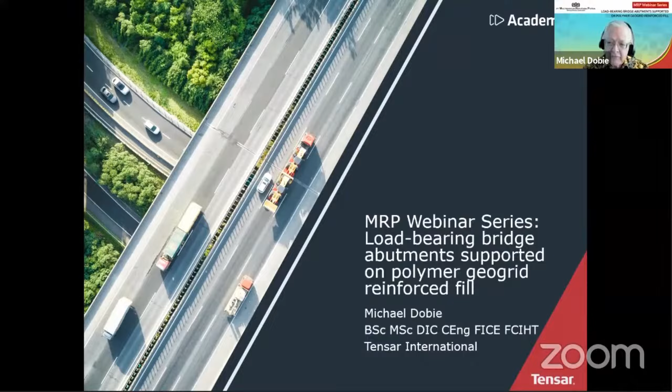The talk today is not highly technical. There are a few technical bits here and there, but a lot of images and messages about the capabilities of this technique when we use it for this particular application of load-bearing bridge abutments. Exactly what I mean by that will become clearer as we go along.

So as you've heard, this is the 9th in this series of geotechnical webinars organized by PT Multibangun Rekatama Patria, and we're looking at load-bearing bridge abutments. The important point is that the load from the bridge deck and any live loads is carried by the polymer geogrid reinforced fill beneath it and then transmitted down into the foundations.

That's the important feature. I have made this presentation a few times before. In fact, it goes back a few years in its original form in New Zealand, and I've also done this in Australia, here in Jakarta once, and also in Malaysia.

Just to let you know, our 10th webinar will look at another reinforced soil technology technique, which is the design of these structures and their performance when we have strong earthquake shaking. That'll be our next event, which will be in November.

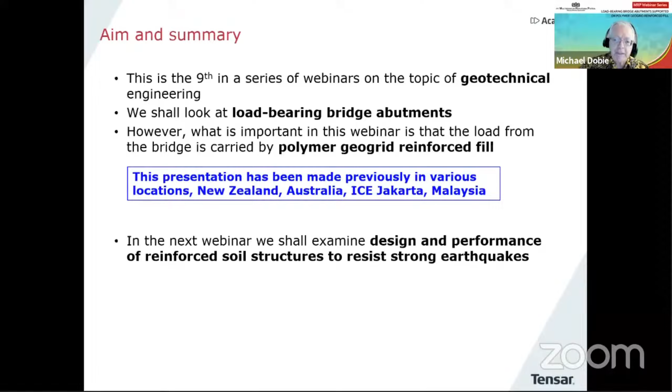So let's have a few images of these structures. We'll meet these all again later on. Here's a very nice looking bridge that you might see anywhere, but this is actually a load-bearing bridge abutment supported by reinforced soil. So is this one. It happens to be a temporary bridge. Another one here, built quite some time ago.

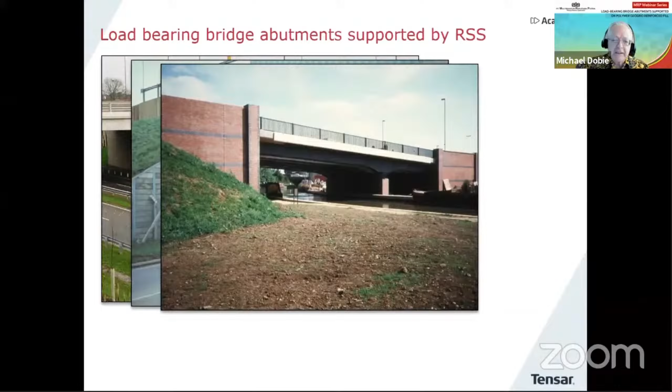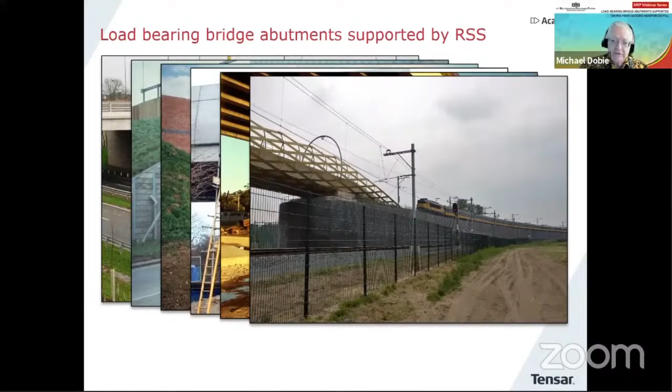We'll also see a bit more about this one shortly. And another one here. This one is interesting because it's actually carrying a road over a railway line. This one is in Australia, Barney's Point Bridge. We'll look at that one in some detail later on. And also this interesting looking bridge in the Netherlands, which is carrying railway loading. But I think you can already see from those pictures a wide variety of possibilities when it comes to load-bearing bridge abutments using reinforced soil to support the loads.

So I think by now you've realized the main aim of this talk today, but the important point is, and I'll repeat it one more time, that we're looking at structures where the loads from the bridge deck, both live loads and dead loads, are supported by the reinforced soil mass beneath. There is no other concrete structure inside the reinforced soil, just soil and geogrid reinforcement. It's not a very new topic or application, and we'll learn a bit more about that as we go along.

As usual in my webinars, I've got these little blue boxes that pop up from time to time, which provide a bit of additional information and maybe a question or two. So really, this is aimed at civil engineers who are involved in reinforced soil projects, or projects where you might want to make use of reinforced soil.

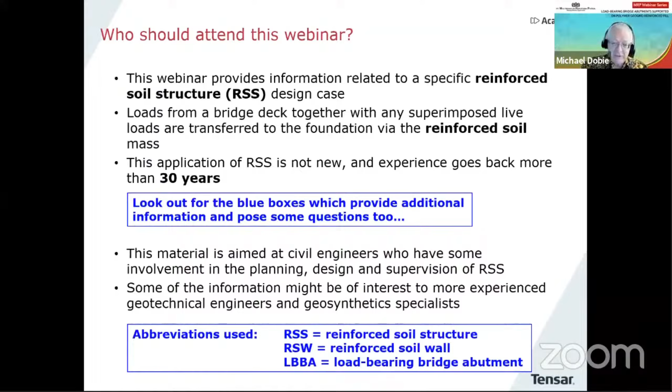This should be of interest to more experienced geotechnical engineers and geosynthetics specialists. I'll mention some abbreviations that will come up on the slides: RSS for reinforced soil structure, RSW for reinforced soil wall, and LBBA for load-bearing bridge abutment. This saves me typing these things out many, many times.

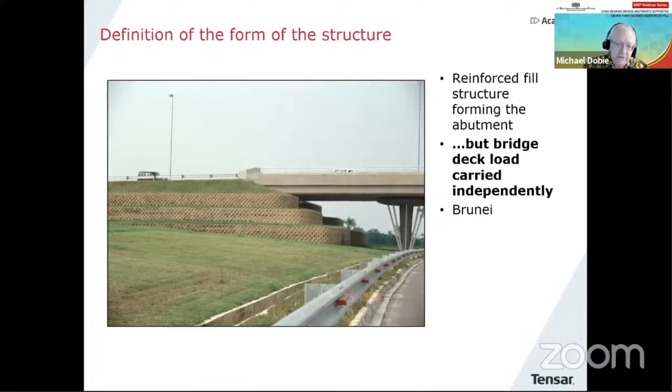And yet another one in New Zealand. In this case, the supporting structure for the bridge is in front of the reinforced soil mass, which forms the approach to that particular bridge.

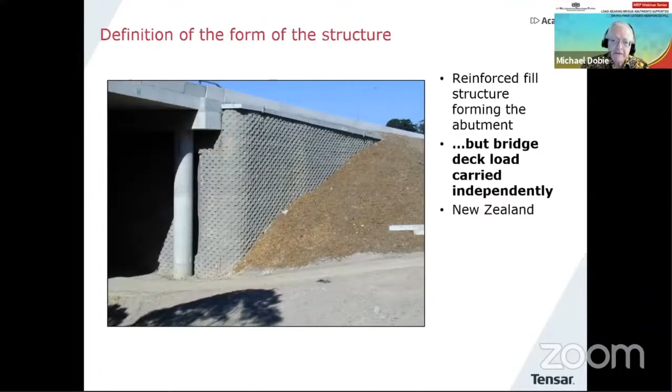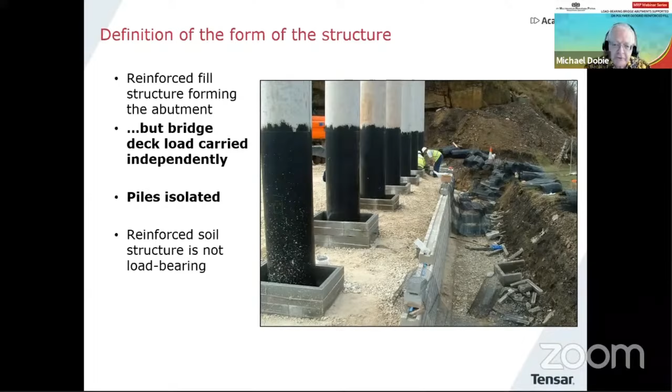Here is a bridge abutment under construction. You can see the supporting concrete structure has been isolated from the fill, so there will be no interaction between the two. That's quite common, and the bridge abutment will be on top of those concrete structures. In this case, reinforced soil is being used to form the abutment around the structure, but it's not load-bearing - it's not carrying the load of the bridge.

Here's another option which quite often happens. In this case, the piles are not isolated from the fill - they're simply within the fill, and the fill is built up around the pile, which will be supporting the bridge load when completed. In fact, that situation sometimes causes a bit of uncertainty in design - what do you do about that pile within the reinforced soil mass? It's a quite common discussion, but today we're not talking about that. We're going to be talking about something different.

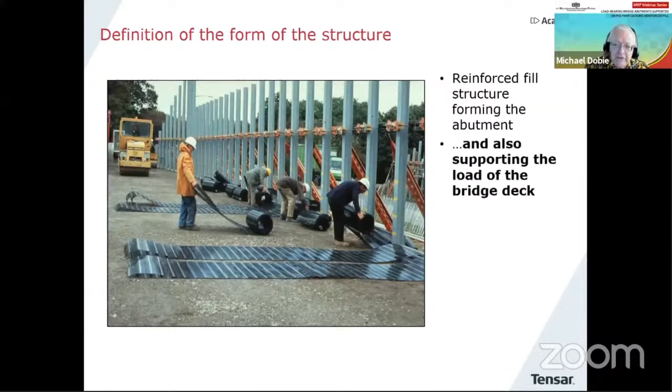What I want to talk about for the rest of this presentation and webinar is reinforced fill structures like this, where they support the load from the bridge deck. This is the whole purpose of the webinar today.

A few examples. This one from the United Kingdom, around 1990. It's a load-bearing bridge abutment - I use that abbreviation LBBA. In the US, if you're familiar with the terminology there, this is often called a true abutment. You can see there they are laying out geogrid. This particular bridge will rest on bearings, but we'll come back to that in a minute.

One point to note here, it's a pretty good high quality fill. I'll talk briefly about the fill we should be using again later on. There it is, almost completed, and completely finished in this picture.

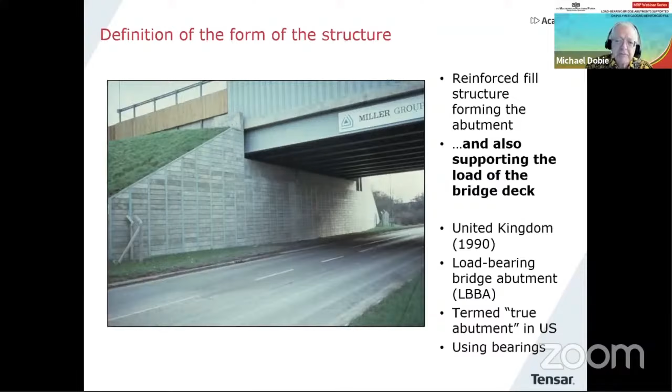Now, this actually was a temporary bridge. One interesting thing about it - the load from those bridge girders is going straight through the reinforced fill that we just saw, but it's designed to carry very heavy loading from mining trucks. So quite an interesting particular example of this technology.

In that particular case, the cross section would look something like this. We have the bridge girder resting on a bank seat, and the bank seat supported on the reinforced fill. That's quite a common arrangement. In this image, I'm showing the bridge supported on a bearing, which allows the bridge deck to change

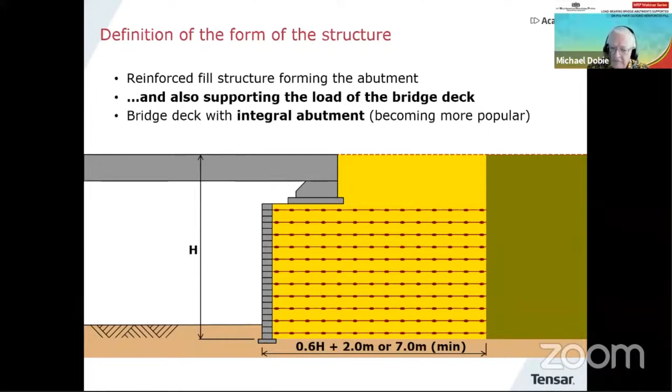its length slightly due to temperature and so on. That is one option, and perhaps most of the earlier bridges with reinforced soil abutments were built using the bearing approach. There is another option becoming much more popular now, which is the integral abutment, whereby there is no bearing, and essentially the bank seat and the bridge deck form a single unit.

Just to show you an example of that under construction. Here is a bridge abutment being built, and you can see there the back of the bank seat being built right behind the facing of the wall. We'll see that from the other direction in a minute.

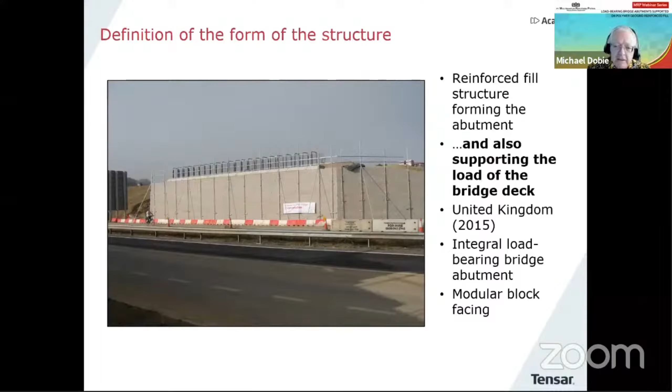This is an integral load-bearing bridge abutment, United Kingdom, 2015. There's the view from the front during construction. You can see the bank seat there, which will be built up to carry the bridge girders. And there they are in position.

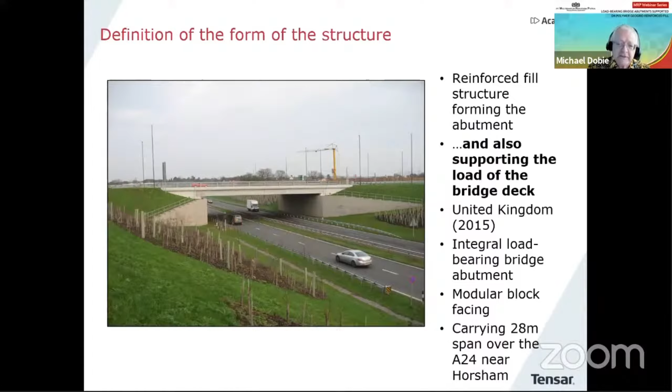So it's now nearing completion. It's using a modular block facing in this case. And there is another view of it. This is actually a 28-meter span over a fairly major road in the south of England. And there it is, pretty much completed. A final view of it in use. I think it's a very nice example of this kind of technology in use.

As I said, it seems to be becoming more and more popular these days. One of the nice benefits with regards to the integral abutment is that the reinforced soil structure is somewhat ductile. It's able to deform a little bit, which of course you need in this case. So I think it's a very good combination, using integral abutments with reinforced soil support underneath.

Perhaps you'd like to look at the cross section of that particular project. Just to show you what they look like, you can see that the reinforcement is relatively long compared to the height of the structure, but that's part of the design requirement that's being followed. That designation, the granular fill type 6I, 6J, is a UK designation, but that's a good quality fill. You can see also that the geogrid is quite closely spaced and even closer at the top

because the loads are at their highest there from the abutment seat. There'll be some backfill behind it, and then the integral abutment rests quite close to the front. This is drawn roughly to scale, bit of infill there, and we build the road on the top. So there is the complete cross section of that previous project.

And what is interesting, for those familiar with these things, are the loadings involved. We have on top of that a 300 kilopascal dead load, obviously from the bridge itself, and up to 200 kilopascals live load, which is from the traffic. There will also be a braking load, so there will be horizontal loads as well to be carried by the bridge abutment system. But it's a very good example of this type of technology in use.

Now, the question here is, is this a new idea? Well, I've already answered that question, but I'm going to answer it again. I was lucky to go to Munich in 2018 and attend an IGS workshop from the reinforcement group. One of the sessions was led by Professor Jorge Zornberg, who talked to us quite recently at an ENA IGS webinar. He had a session on another one of his specialities, which is load-bearing MSE, mechanically stabilized earth abutments.

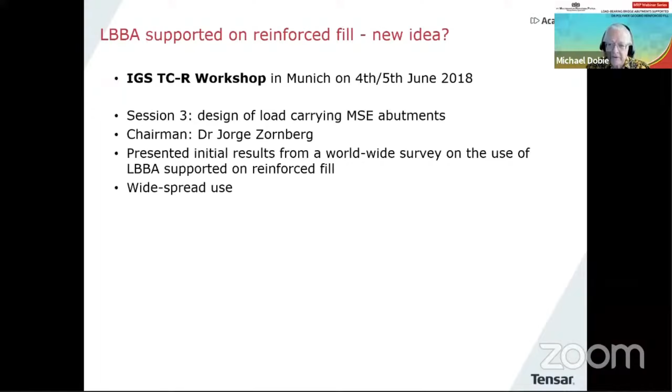He presented information from a worldwide survey to get some idea of the use of this approach. And it turns out to be quite widespread, in some countries more than others. So for example, in the US, UK, and Europe, it seems to be increasing.

Not so sure it's quite so much in Asia, but maybe that's something that could change, with the exception of Japan, which I'll mention briefly later on.

So we've learned something about the experience with this technology. The answer to the question above is definitely no. We've already seen a temporary structure built in the UK in 1990, which is 31 years ago.

Let's look at another one. I particularly like this structure because it just looks nice. What's being built there is a polymer reinforced soil block. You can see the steel bridge beam resting on top of it, and there is a central pier.

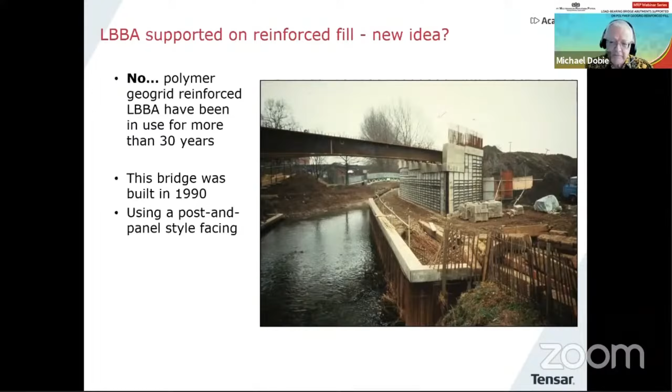This one is also being built in 1990. It's using a post and panel style of facing, which people tried to use in those early days because it made use of readily available components rather than specialized ones like full height panels, which we'll see later. This is to carry a fairly major road in the UK over a river.

It's designed to a code called BE 3/78, which was a sort of precursor of BS 8006, but specifically for load-bearing bridge abutments. So that is what it looks like, and there it is finished. Now, because UK people like brickwork, that original facing was actually finished with a brick look, so it looks very nice. It is brickwork, very attractive, and there's perhaps a clearer view of it you can see there.

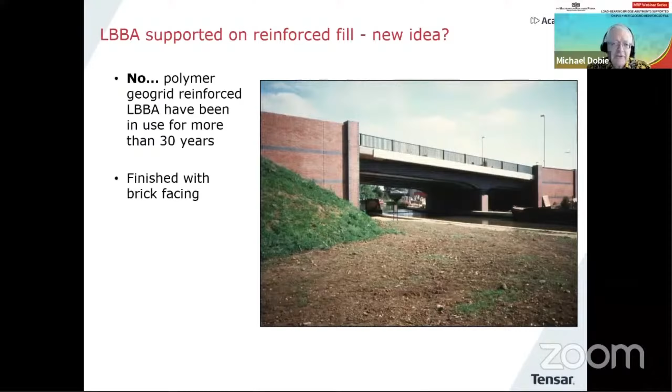I've looked at these pictures many times over the years, and I thought, what does it look like today? Sadly, no chance to head off to the UK to check it out myself, but luckily the internet can come to our rescue, and I found this rather nice picture. There is the river, and we can see the bridge abutment there.

This was about 28 years of service. Also, because of the incredible abilities of things like Google Maps, I could actually look at the top of the bridge. You can see the steel railing on either side, and also the expansion joint just behind that truck. It's rather nice that we have a couple of heavy vehicles crossing the bridge at that particular moment. So yes, this structure is still serving its purpose very adequately 30 years on.

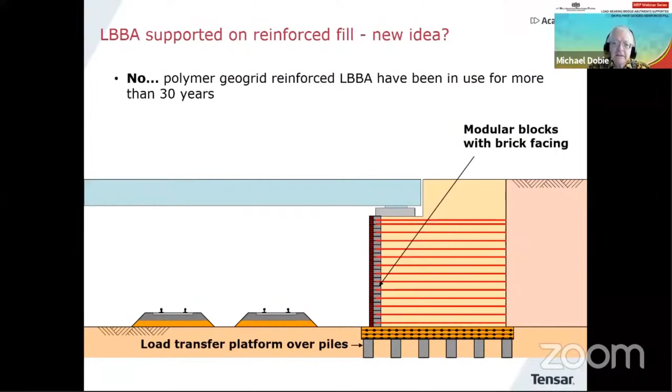Another one, a bit younger, built in about the year 2000. It has an extra feature which is quite interesting. This is the west of England, and parts of the west of England have some quite soft soils. So in this case, this abutment is supported on piles, which you can see there in the diagram.

Then what's called a load transfer platform is placed over the piles to spread the load from the abutment above into the piles. So we're seeing two geosynthetic technologies being used at the same time, but it permits the load to be spread nicely down into the load-bearing layers further down. This is crossing a railway, as you can see from the picture, with a train going by.

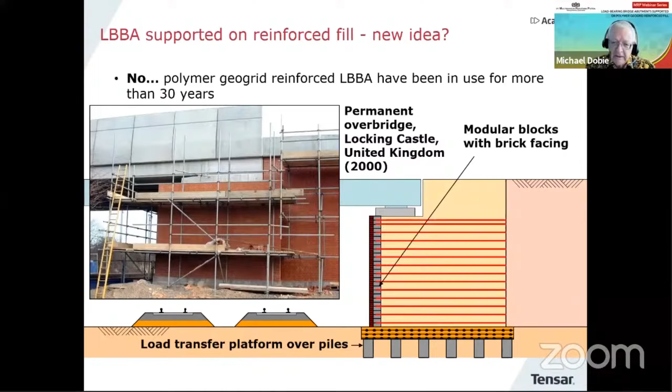Again, they're using modular blocks, and at this stage it doesn't look particularly attractive. But again, with this desire to have things covered in bricks, it was later covered in brickwork, and that was the final look of the structure. A general view of this one, we can see it here - it's a very elegant looking bridge.

Again, I thought, what does it look like today? If we make good use of Google Maps, we can see it carrying on doing its function extremely well, in this case after about 20 years or so. So those are two examples of bridges. They were both using bearings - not integral - just showing you some of these early examples.

So let's talk briefly about design. Is there guidance available for load-bearing bridge abutments constructed from reinforced soil? The answer is most definitely yes. The obvious one you would go to if working in the UK, and certainly some of those examples we saw were in the UK, would be BS 8006. Section 6 provides information on how to carry out design for these structures.

It was first published in 1995, and already had this advice back then - that's 26 years ago. It covers the ultimate limit state and serviceability, which is important, and I'll mention that again briefly as we go along. But there's no earthquake loading. So if you're designing for earthquake loading, like you would be in many parts of Indonesia, BS 8006 doesn't give you advice on that - you need to go elsewhere.

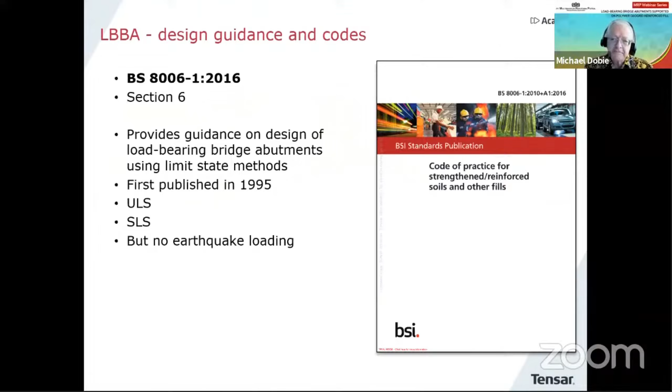Also, we carry out a post-construction strain check on the reinforcement, and we limit that post-construction strain to 0.5%, which we'll see again briefly in a minute.

Then the program does a check of the stability of the bank seat itself. And it looks a rather hair-raising view, that one, with lots and lots of numbers and so forth. But it's what it's doing.

It's taking 6 different load cases. We have the temporary case where we don't have the bridge in place, and then of course we have the long-term case with the bridge in place, and they both have to be looked at individually.

And then we calculate the loads from the bank seat, which are applied to the top of the reinforced soil structure. So that's the cross-section we would then see, and that can be analyzed, taking into account those additional loads from the bridge applied into the reinforced soil mass.

Now, this is using the BS 8006 tie-back wedge method, and in this one, you can see we've achieved a satisfactory layout of Geogrid. And then we can do this post-construction strain check.

So what you're seeing in this particular window, the little gray diagrams on the left with the colored bits in them, those are an assessment of the distribution of strain, post-construction strain, along each piece of Geogrid for the long term. And then we can take an average value.

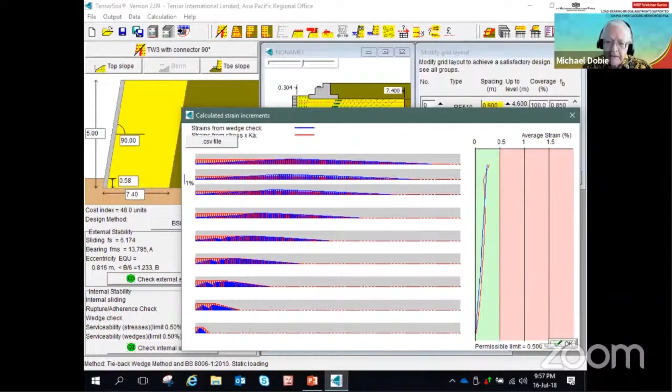The profile on the right-hand side where it says average strain, if you can read that, you can see the limit of 0.5 is given there. So as long as you remain inside the green zone, then your post-construction strain prediction is within the requirement of BS 8006. We're going to come to that again briefly in a second to explain how that's actually working.

Now, there we have our design, it's satisfactory, but maybe in Indonesia, we want to look at the case of earthquake loading. So we have some help.

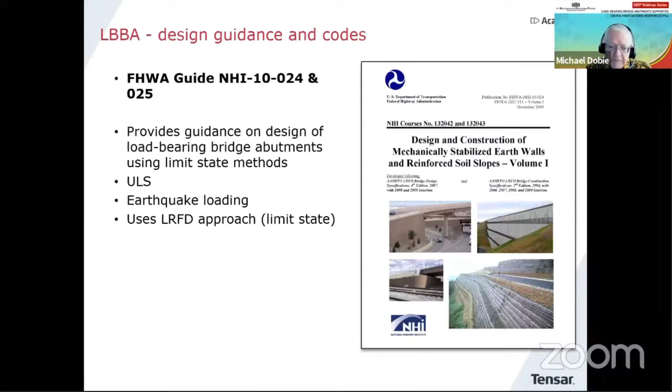And there is, if you like, an accompanying document published by FHWA with that particular reference there NHI-10-024 and 025. And this is nice because this is also based on limit state, using the LRFD approach, and it has a very nice detailed worked example in Appendix E5.

So if you want to understand much more about the calculation procedure, you can go and look inside that particular document. Appendix E5 will tell you a lot. Sadly, in a way, the worked example doesn't include earthquake loading, but you'd have to see how that works by looking at the rest of the guide.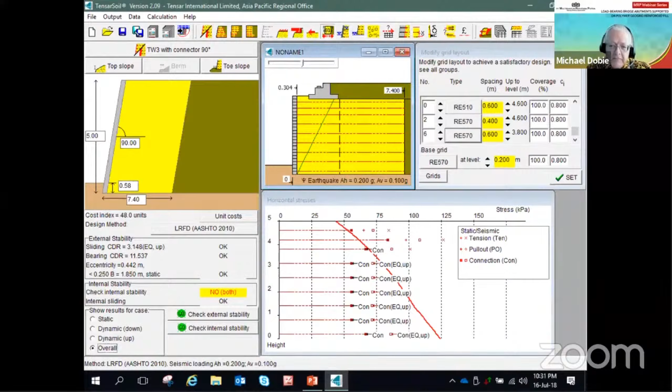That's mainly coming from connection issues, but that's a bit of a weakness of that particular technique, the tie-back wedge. However, this means if we wish, we can analyze it using that technique. But what we can also do is switch over to a 2-part wedge method.

And this is something I talked about actually in our previous MRP webinar, the benefits of using a 2-part wedge approach.

And that's what's going on here. So all of those green lines you can see in the cross section are wedges that have been analyzed, taking into account the bank seat loading and giving a satisfactory result, much more efficiently than tie-back wedge. And there is the result of an internal calculation.

You can see here we have two different loads. Z is the applied load, R is the resisting load for any particular wedge. And you've just got to make sure that our CDR, that's capacity demand ratio, the ratio of the two, is greater than 1. And you can see in this particular case, it is.

That can be done for the static case. And you can also see down there the dynamic case, with both the vertical acceleration up and down. That's a topic I'm going to talk about more in the next webinar when I talk about reinforced soil design, this issue of the vertical component of acceleration and why you might want to take it into account. So that's something to talk about next month.

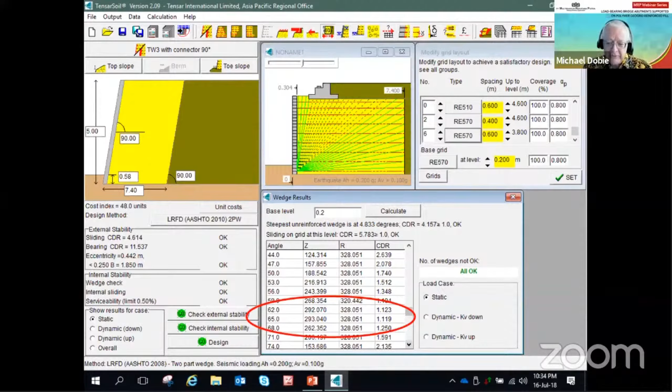And there we have a satisfactory design.

And you'll see also later on in some of the examples I show you the use of sand fills. Of course, a good quality sand would also be extremely good. This is almost certainly a case where you'd want to avoid clay fills, not because you couldn't design for them, but I think more because the deformations may be a bit difficult to control in service, especially the vertical deformations. So this is definitely a case where it would be wise to avoid the clay fills or the tanah merah fills, I think, for load-bearing bridge abutments.

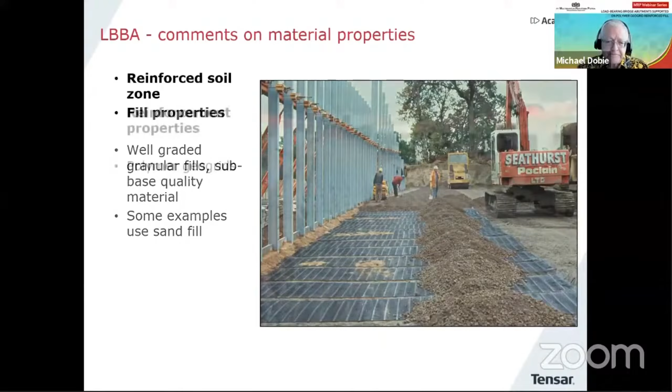Just a few words about the polymer geogrids. We can see some geogrids laid out here behind a panel wall. It's not actually a bridge abutment, but just to remind us what these materials can look like. These are HDPE geogrids. And in order to carry out our designs, we need strength values for ultimate limit state, that's to say long-term failure, serviceability limit state, that's to say controlling deformations, and also the seismic case.

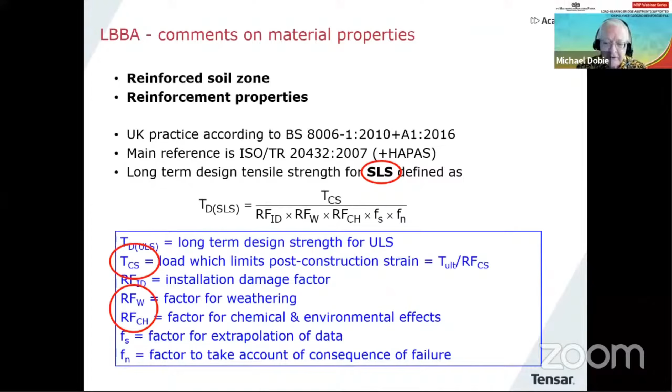Now, as you see it there, this is defined for the ultimate limit state, in other words, failure or rupture of the geogrid. But when it comes to load-bearing bridge abutment design, we also want to have a second definition, which is for the serviceability limit state, called SLS for short, inside the red circle near the top, in the middle of the slide. And we've now slightly changed because we're now using a thing called TCS. That's the load which is going to limit the post-construction strain to a certain value. And that's what I want to talk about briefly.

So to find out this particular piece of information, we need to carry out what are called creep tests, where we hang up specimens of the geogrid in a creep laboratory with weights on the bottom, and we measure their strain against time. I did talk about this briefly in the previous webinar as well. But today I want to concentrate only on one thing, and that's deriving what we call isochronous curves.

So from the creep data, we can derive load strain curves. Now, load strain curves are things that people like to see when it comes to, say, a tensile reinforcement. People understand this very, very nicely. It's that very, very important relationship between load and strain.

And we can derive it in this case for a duration of 1 month of loading, and that's what we see at the moment on that graph. We can also derive a second line, in this case for a 120-year duration.

Now you might say, well, how can you possibly do that? We haven't been doing creep tests for 120 years. Well, we can use high temperature testing to help us do that. That's quite a long discussion, so please accept my word for it for the time being, but we can do that by careful interpretation of creep testing using high temperature data.

So we now have two isochronous curves, one for 1 month and the other for 120 years. And then what BS 8006 requires is that the post-construction strain should be limited to 0.5% during working life, or post-construction. It is assumed that post-construction is from about a month to the end of design life, in other words, between those two curves that you can see.

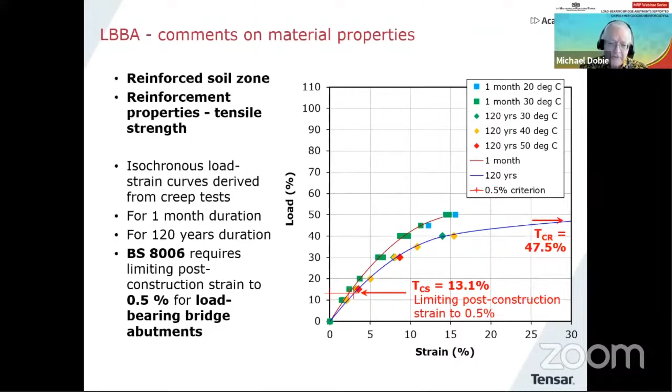And when earlier on we saw that little window pop up with the 0.5% in it, that's what it was limiting when we set that within the design procedure.

Perhaps just worth mentioning that when you carry out design of load-bearing bridge abutments with reinforced soil techniques, sometimes because of this 0.5% requirement, it's quite often that the SLS check could be more critical than ultimate limit state. In fact, in the early days, say the BE 3/78 document, that design procedure was based on serviceability mainly.

Just leaving strength behind and going to durability, just a few words. Again, I covered this in quite some detail in the last webinar, in MRP 8 webinar, but we need to be very careful about this. We need to check that we have adequate durability, and that's normally in terms of things like weathering.

You're not going to expose the geogrid for long in a load-bearing bridge abutment, so that's not going to be too much of a problem. But things like microbiological degradation, oxidation, and the effect of acids and alkalis need to be investigated using both screening tests, which are quick tests, but to get the real long-term predictions, we need to carry out a lifetime

exposure tests. So this is a really important thing, especially because durability becomes even more important in hotter climates. Generally, polymers will be affected more rapidly under higher temperatures when it comes to degradation. So we have to be extra careful when it comes to climates like we have here in Indonesia, where it's generally hotter and wetter. So please take that into account when you think about these things.

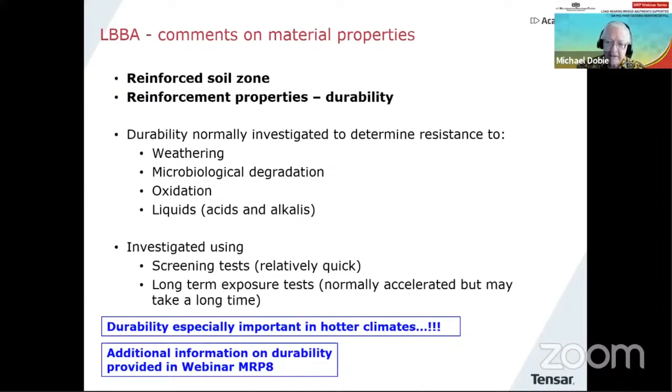So let's leave those material properties behind and now look at some measured static performance. And let's start with one of the very early ones. It's interesting, certainly in the UK, this was built in Stirling in Scotland.

It's just a pedestrian underpass. It's not a very huge span, but it is carrying a road load. The structure on top is a road, so it's carrying normal traffic loading up to heavy trucks.

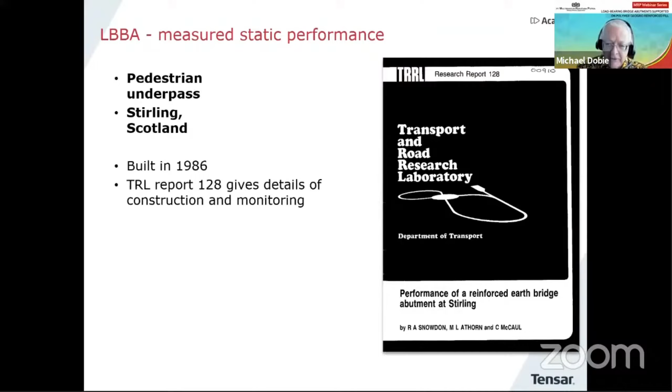And this one was dating back 35 years now, so quite a long time ago. And because it was a very early structure, a lot of attention was paid to it, and there is quite a comprehensive report, it used to be called TRRL, it's now called TRL, Report 128, which tells you all about the construction and monitoring of this particular structure.

So they used a cellular mattress, which today we call stratum, to help support the abutment and spread the loads into the softer soils underneath. It was a simple little structure by today's standards, but a very early one, and lessons were learned from it.

When it comes to the monitoring, it was found that the total deformation at the top of the panel was less than 20 millimeters, and it rapidly stabilized. If you want to see this in more detail, you'll have to get hold of that report or ask me for a copy.

The vertical settlement actually was bigger than the horizontal movement, but because of the slightly compressible subsoils, they got up to about 58 millimeters of vertical settlement, which also reduced with time.

When it came to the geogrid itself, the maximum increase in strain during the service period was about 0.7%, with a mean value of about 0.3%. I've got a feeling that this data was part of the contribution to those early limits still published today in BS 8006 about a mean strain limit of 0.5% for load-bearing bridge abutments.

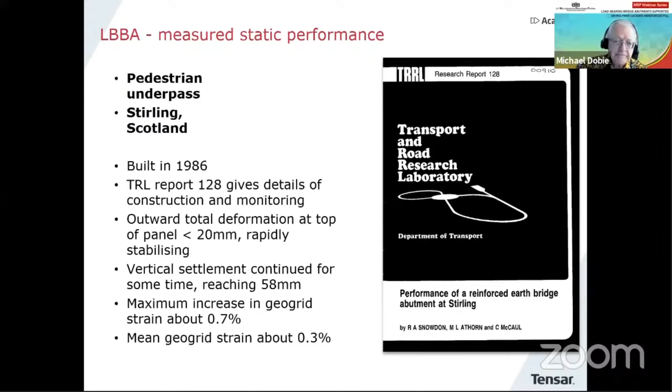And here is a bigger one straight away. It's one that I saw from day one pretty much. Barney's Point Bridge, built over the Tweed River, which separates Queensland from New South Wales on the east side of Australia. This one was built in 1993, so this is getting quite old now as well, 28 years or so.

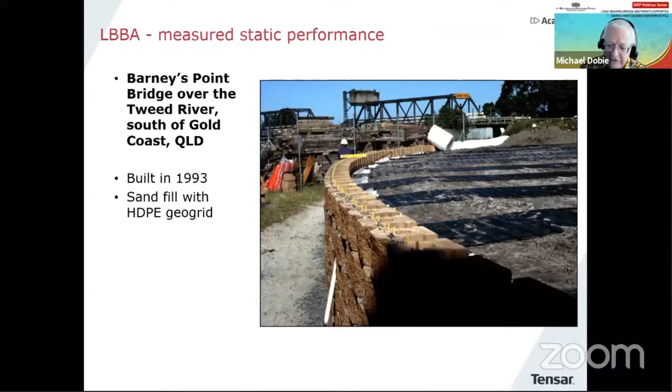This one is using a sand fill with an HDPE geogrid, and it's using a modular block facing, which you can see very clearly there. Also in the distance, you can see the old bridge in that particular photograph.

Because it was early use of this technology in Australia, it was quite carefully instrumented. For example, one thing we used were these load bolts to try and measure the load in the geogrid. Now, there was one slight issue with that approach, because the load bolt system is so stiff, it was attracting too much load, so in fact they overread the load in the geogrid. So measuring load in geogrid is not easy.

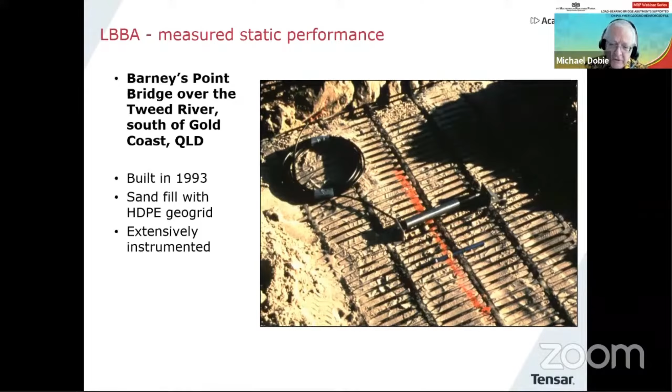Rather simpler is measuring strain, and this was done with strain gauges of this type. Again, these were on the top or bottom of the geogrid, so they work reasonably well, and we did get some quite good data on strain measurements.

First of all, there were targets on the facing that allowed us to measure the forward movement of the structure. And to be honest, if you're looking at instrumentation of these structures, that's one of the simplest and cheapest things to do - simply put some targets on the face and use accurate surveying techniques to measure their location and change in location.

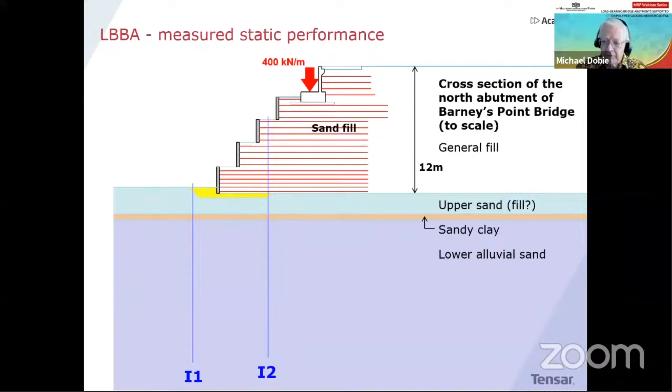So that's quite a high load. Overall height about 12 meters from the original ground level up to the road, and you can see the position there of I1 and I2. Now, one nice thing about inclinometers is as long as they don't get blocked or too distorted, they will last for a long time.

Many instruments like strain gauges are unlikely to keep going for 30 years, but inclinometers generally hold up well.

And we're going to have a look at a couple more before we come to a conclusion today. Another one built more recently, Founders Meadows, built in Colorado. There are 2 lengthy research reports, and if you can read the names on those documents, you'll see again Professor Jorge Zornberg's name there. He was quite heavily involved in this. This again was a load-bearing bridge abutment, heavily instrumented, carefully monitored, and I'm only going to show you a few pages from this, because if you want to study this in detail, I suggest you get hold of these reports - there's a lot of information in them.

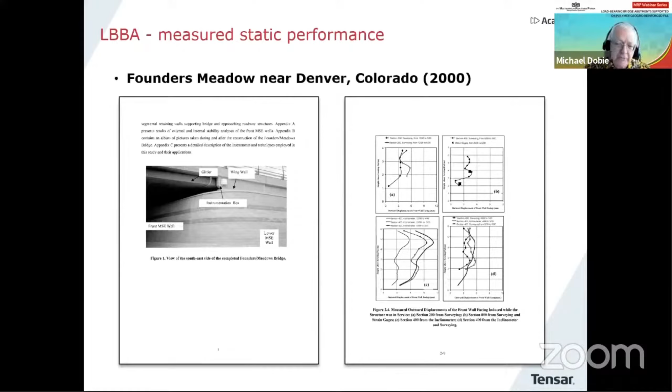So here we see on the left a picture of the bridge itself. You can see the bridge girder resting on top of the load-bearing bridge abutment, and that diagram, which I'm sure you can't read, shows the forward movement of the wall - the scale at the bottom is only a matter of a few millimeters, so very small movements. Then there's a cross-section through the structure, and the diagram on the right-hand side is the strain in the Geogrid during construction, and again those strain values are very, very small indeed. Anyhow, this is something to study - if you want to learn a lot more about that structure, those reports are readily available. That was Founders Meadows.

So now let's move to a bit more experience, because when I was first preparing the material for this presentation a few years ago, I contacted my colleagues around the world and said, look, I'm doing this work, and certainly that previous one obviously came from colleagues in the US. I asked if they had any interesting information on load-bearing bridge abutments I could use, and a good colleague of mine, Theo in the Netherlands, said yeah, we've got a few, and sent me this incredibly good information. This was one of them. I'm not going to show all of them today, but this one is particularly interesting.

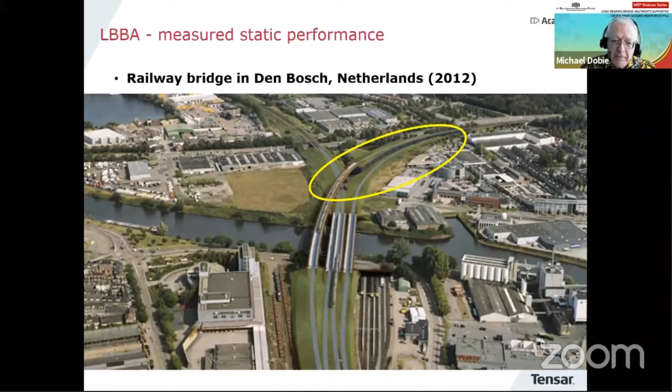It uses a technique particularly popular in the Netherlands, which is full height panels. It's worth talking briefly about these. We've seen a lot of modular block structures so far, which are small concrete units, but a full height panel is a large piece of concrete, so handling becomes much more important because they weigh several tons. One benefit is that because they're full height, you can put them all up very quickly with your crane, which is an expensive piece of equipment. Having got them all up, you prop them, and they are then all put up in one go, so then the crane is finished.

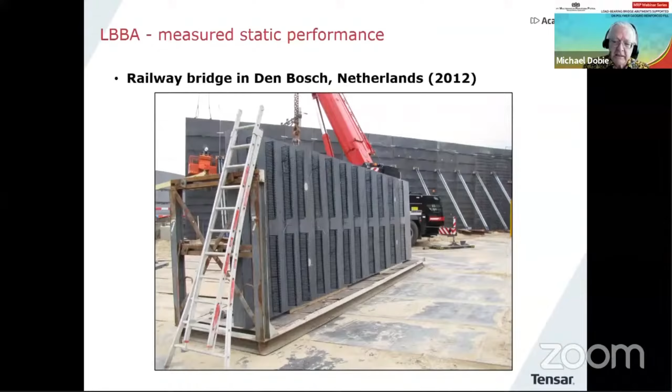There are pros and cons with all of these techniques, but let's look at the results of doing this one. After propping up the panels, which you can see in the background, and the one lying on its side in the foreground, little bits of geogrid will be connected to the main pieces of geogrid using a connector called a bodkin, and that forms the full reinforced soil structure when compacted into the fill. You can see here that they're being propped - that's the front nose of this structure, which will carry the bridge abutment itself.

Here we have a view inside that section of the structure. We can see the panels there and the placement of the sand fill. This is using a sand fill - the Netherlands, for those who know it, has a lot of sand, so most of these structures are built with sand fill.

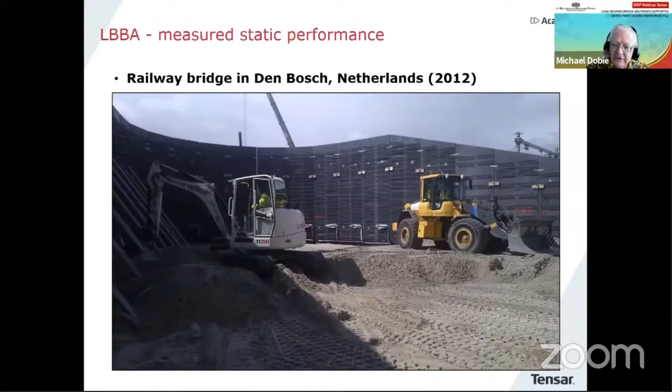That's the view now from the outside. The fill has reached almost the full height. One interesting thing here is that because the panels were propped on the inside, they were able to keep the rail track running nearby, which is quite a nice advantage of the technique.

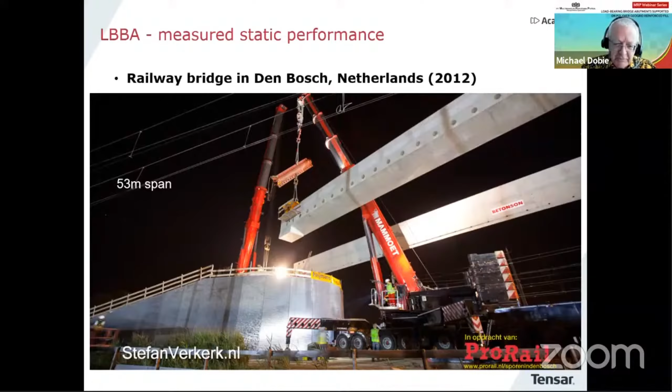But now we come to the moment of placing the bridge girders, and when I first saw this, I was certainly amazed. They're placing the bridge girders here - you can see a nighttime occupation of the railway using a couple of cranes. The span is 53 meters, which is a long way, and I think this must be one of the longest spanned bridges supported on reinforced soil load-bearing bridge abutments, as far as I'm aware. There you can see the ends of the girders resting on the bank seat foundation itself, so below there is just sand and geogrid.

Because it was such an important structure and there's so much interest, some simple targets were fixed on the facing panels at a number of locations to measure the movements, so they can be checked by surveying techniques. You can see the little white marks.

So if we look at B2, I'll explain it a little bit. The graph shows height in the vertical direction versus the movement. Zero is in the middle of the horizontal axis, and the next division is 20 millimeters.

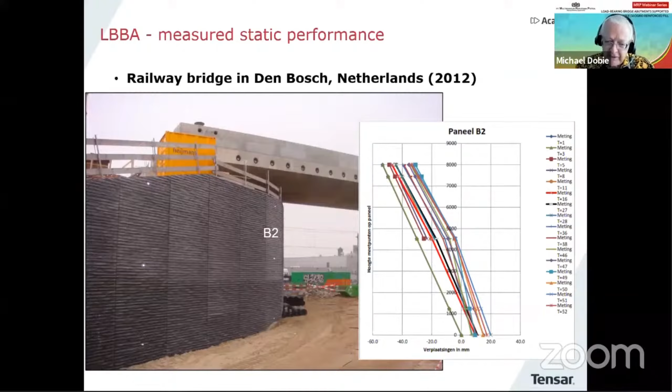Because this is a panel, you can measure it from day one before you even place any fill. The green position is when they first put the panel up, and most of that forward movement comes as you place the fill. There's also a bit of a jump in movement roughly halfway through, partly because at some stage they drove some piles into the sand fill just behind the reinforced soil structure, which also caused a little movement.

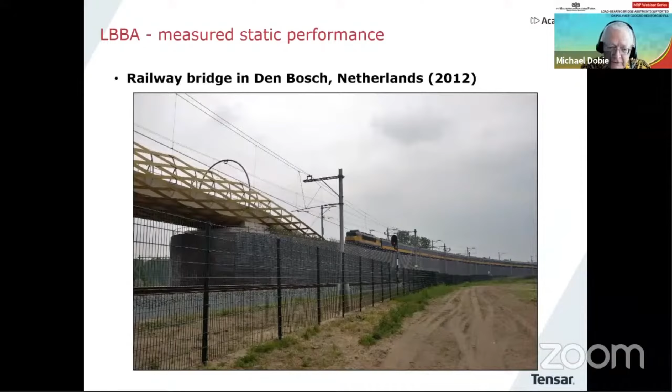The bridge was finished off with this rather interesting look to it, and here it is about to take the load from a train. When I first ran through these pictures, I was quite amazed. That's a 53-meter span carrying railway loading, supported on a reinforced soil structure. Really impressive.

Another one, perhaps not so grand, but it looks more like a regular bridge. In fact, it looks very much like the one I showed you earlier on, because it's similar - a similar kind of span built in Kent in the UK. Also, these are integral abutments built in 2016-17.

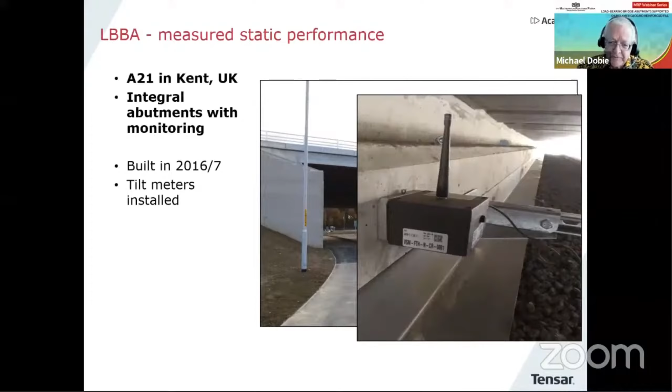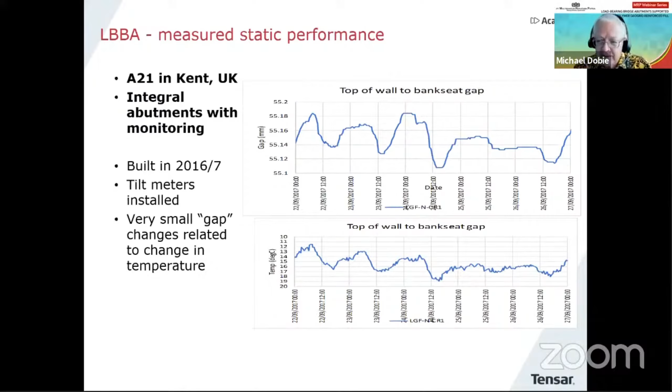That's going back to 2017, so we'd like to get that more up to date. There was also measurement of the gap between the bank seat and the wall at the top - the top diagram shows the gap in millimeters, very small amounts. You can see that this gap did slightly change against time, but the lower diagram is actually the measured temperature, so the majority of that movement is related very much to the change in temperature. It's important to measure all of these variables when looking at performance of these sorts of structures.

Now, the last thing is about performance under seismic loading. When it comes to bridge abutments, the reinforced soil technique, if you're expecting strong earthquake shaking, actually makes a great deal of sense, because you have a very ductile structure - something I'll talk about in more detail next month. But has it been tested?

Have any of these abutments been shaken strongly by earthquakes? Well, there probably have been, certainly in Japan. But this is a test being carried out at UCSD, University of California San Diego. They have a number of large-scale shaking table bits of equipment, and in this particular case, they've built a half-scale load-bearing bridge abutment.

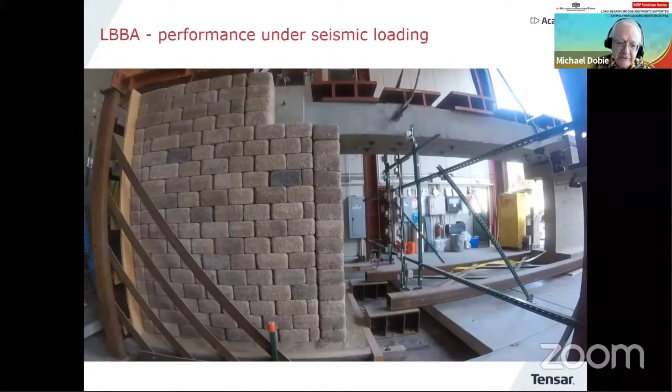This was the Imperial Valley earthquake record.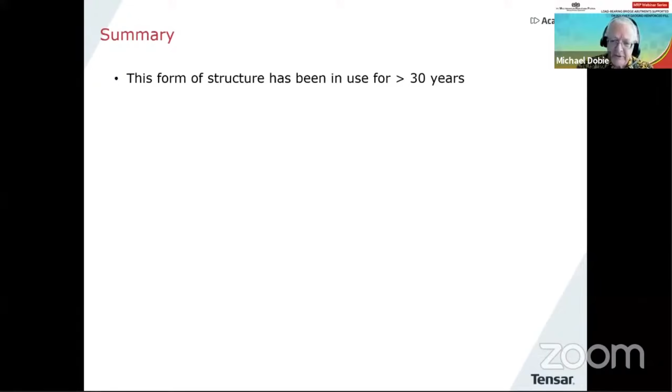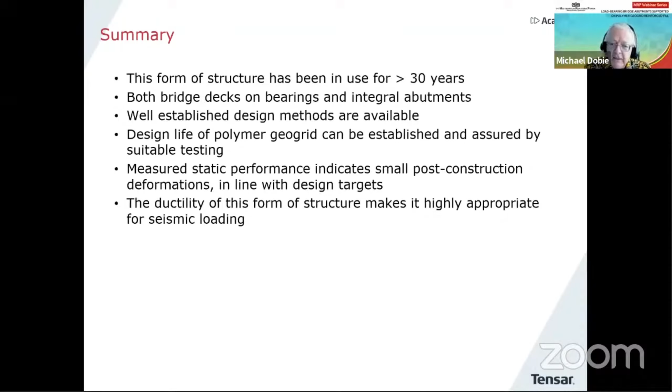So that brings me to the end, almost. Just a few comments: these structures have been in use for over 30 years, as you've seen. We have examples using bearings as well as integral abutments, although these days the integral abutment seems to be getting more popular, with less maintenance. There are well-established design methods available, and we can look carefully at polymer geogrids and make sure we have adequate long-term behavior and durability checked by testing. We can see from measured static performance that post-construction deformation is generally in line with design targets, which is of course what we want, and we can also see we have this excellent ductility when it comes to seismic shaking.

One thing just to tell you about, and maybe this is something INA-IGS might try and arrange next year: Professor Fumio Tatsuoka, a name I'm sure many of you have heard, has wonderful information about the performance of reinforced soil structures, including load-bearing bridge abutments, used to build the high-speed railway systems in Japan, where the seismic side of design is extremely important. Incredible information - you can certainly find the published versions of his material in many places, but maybe that's something we'll try and arrange through the Indonesian chapter of IGS next year.

But before I finish, a final word from the Netherlands, because my colleague Theo again sent me some wonderful information - this is like a bit of a story of a structure. So what are we going to look at? We're going to see a drone video, because that's what we like to look at these days, of these structures. We're going to look at a structure which has got 3 bridges and therefore 6 abutments. The best thing to do is get on and start flying.

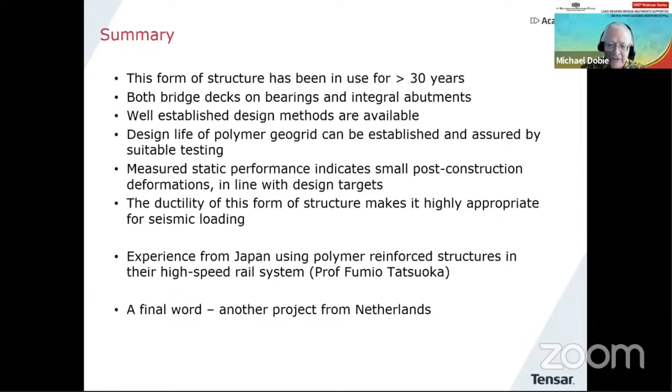So off we go, we fly along this structure. It is at this stage nearing completion - the road hasn't been built yet, of course. We are now approaching the first bridge, and you can see how it's clearly a sand fill, because this is the Netherlands again. Right, we stop there, let's get off the plane for a minute and have a look and see what's going on.

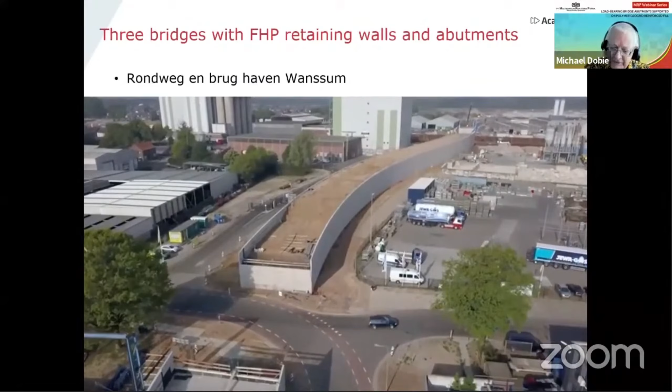So again, we're using these full height panels with a very nice looking finish on them there. They're propped on the outside in this case. And then on the inside we have the short tails of geogrid, which will be connected to the main reinforcement to provide the reinforcement effect.

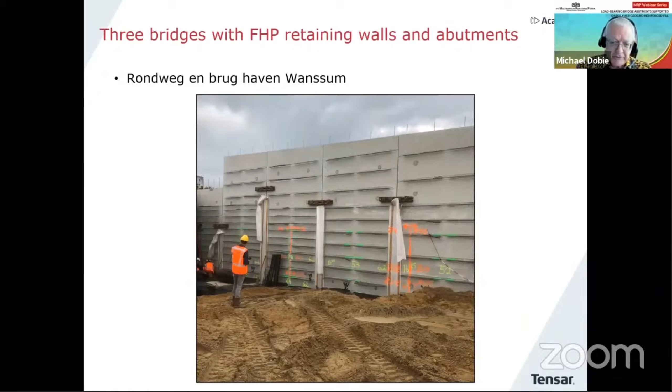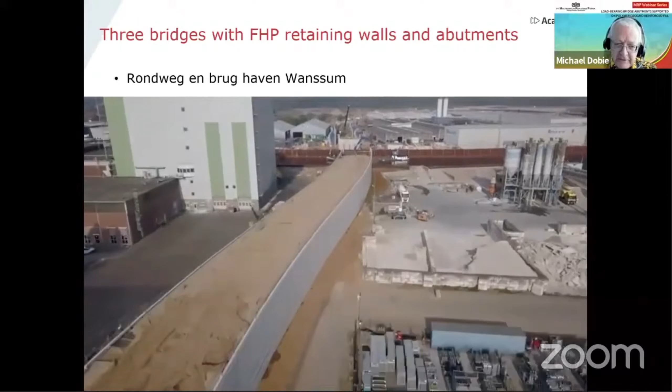Then we carry on our flight, flying further down the structure. The walls are getting higher and higher as we go along it, which you can probably guess from the view on the side. Then we start to approach the main bridge, which is over a canal, and as we approach it we begin to see it's actually going to be quite a big span. Here is a view of this next bridge.

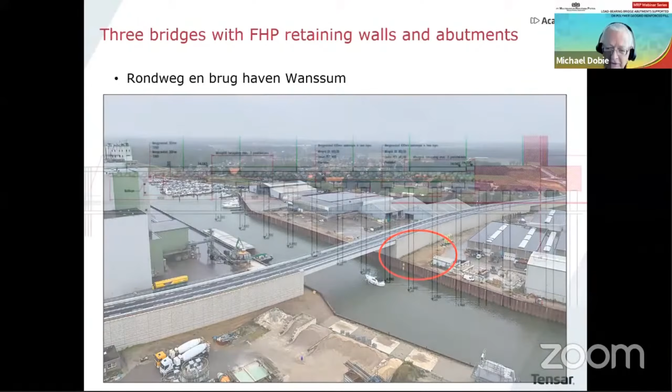But there's an interesting detail here worth looking at. If we look at what's happening underneath the bridge - I'm afraid the drawing's in the other direction - we have a cross section here. What you see on the right-hand side, the red bit, is the foundation to carry the bridge deck through a concrete structure, which goes upwards and is on piles. Much of the Netherlands has soft soil, so it's resting on piles.

But because they're concerned about the effect of settlement on the soil-supported structure behind the pile-supported abutment, they use a very clever transition technique: piles of reducing length as you come back from the pile-supported abutment until the length becomes almost nothing - in fact zero. On top of that they put a load transfer platform, and build a structure on top of that. The purpose of that detail is to reduce the effects of differential settlement behind the piled abutment. So there's another interesting use of geosynthetic technology, because the LTP incorporates geosynthetics.

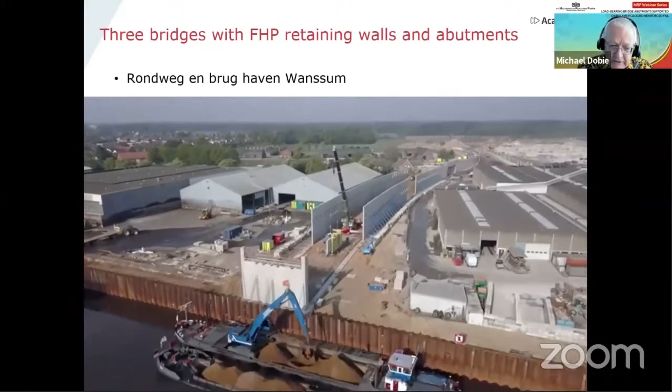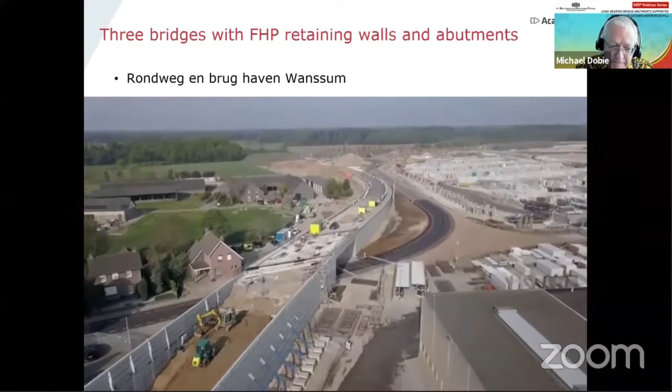Anyhow, let's carry on flying down the structure a bit more. Off we go. Now if we look down, you can see they're delivering a panel there. They have a special frame which lifts it up, and then the crane puts it into position. You can see this part of the structure is at an early stage of construction. Then we reach the third bridge - here is bridge number 3.

And then I think we stop and get off the plane again. Now, this is also a bridge where the load of the bridge deck is carried by the reinforced soil itself. An interesting point here is that we have a very sharp return - in other words, a very difficult geometry where we have an oblique direction of the road going underneath the bridge. So to sort this one out, we have some additional detailing to look at.

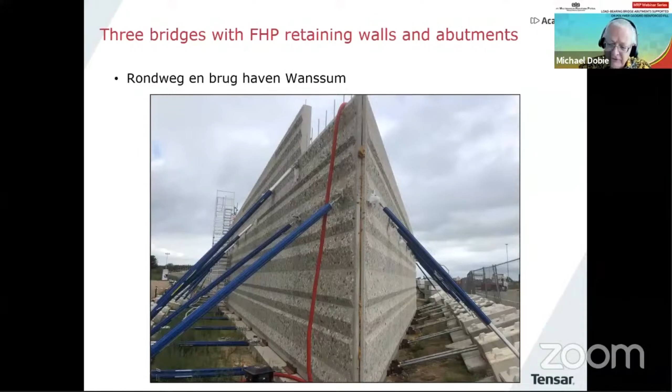It's a very common question - what do you do when you have this situation? If you look inside, you can see the sharp corner. So what they're doing there, because you can't extend the geogrid the correct length, is use concrete in the far corner, and also use cement stabilization of the sand further back. So they had some details to help deal with that issue, but the load of the bridge deck is still carried on the reinforced soil, which you can see there.

Having done that, we carry on flying for a short way further, just a short distance, as we head down to the far end of the structure. So I thought that was rather interesting - a lot of interesting features in that little flyover, with two types of support of the bridges and some interesting techniques being used.